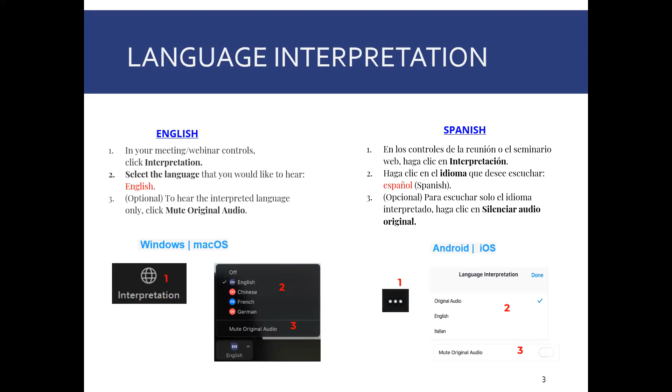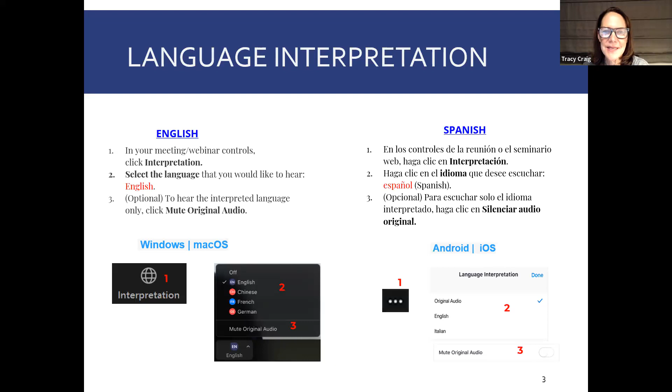This is Alameda County Department of Environmental Health's community meeting on the proposed plan to clean up contamination in soil and soil gas, which is the air spaces between grains of soil, at the 1232 High Street site in East Oakland. The purpose of the meeting tonight is to provide an overview of the proposed cleanup plan, answer any questions, and accept public comments from the public.

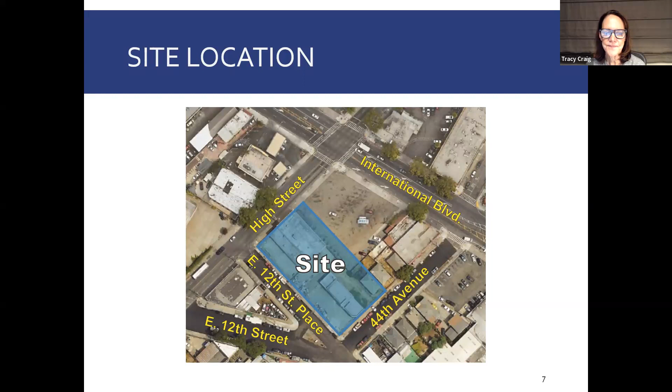Quick overview, the property owner is here listening today. The property owner plans to redevelop the site as a self-storage facility. Very important to note that the property owner did not contaminate this site, but is voluntarily cleaning it up to support redevelopment. There is lead found in shallow soils, and some benzene and chlorinated solvents found in soil gas, the air spaces between grains of soil.

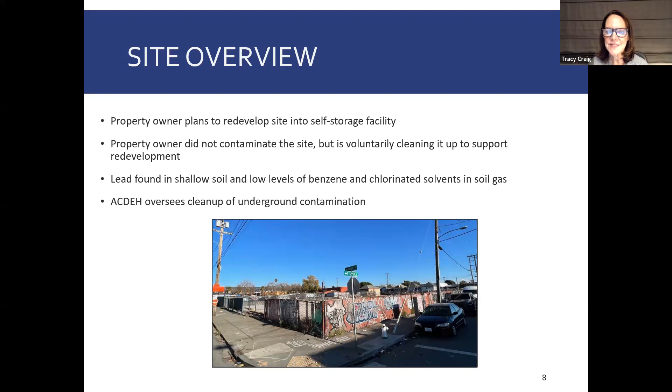The Alameda County Department of Environmental Health oversees cleanup of underground contamination. Purpose of this meeting tonight is solely to discuss the proposed cleanup. This is not about redevelopment of the property. And with that, I'd like to hand it over to Noel, who will go through site investigations, proposed cleanup plan, and community protection measures.

Good evening. There have been several site investigations conducted on this site, around half a dozen, starting in 2014 to the present, to evaluate the impacts to the subsurface from this historical land use. There were multiple historical land uses on the site, starting as an automobile service station, blacksmith shop, battery shop, paint store, and several other businesses including a mattress factory, that would have caused potential impacts to the subsurface from releases from these former site uses.

Those investigation findings have found lead in shallow soil up to approximately 3 feet below the ground surface at levels that would require cleanup, and low concentrations of benzene, tetrachloroethene, which is PERC or PCE, used as a cleaning agent, and its breakdown product vinyl chloride, in soil vapor at pretty low levels. Groundwater does not seem to have been impacted at this site from these constituents.

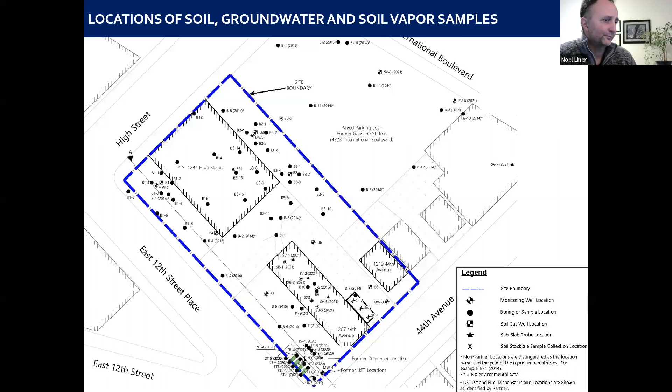So the corrective action plan is available on GeoTracker and is the subject of this discussion tonight. That plan is in draft format and it's available for public comment, to which we would respond if there are technical comments to the plan. That plan summarizes the investigation findings. It proposes the broad outlines of how the contamination of soil and soil vapor will be remediated.

That will include excavation of the lead contaminated soil. It will include installation of a vapor barrier and venting system to address the potential vapor intrusion issues related to the benzene, PCE, and vinyl chloride in soil vapor. That corrective action plan also includes community protection measures that will include air monitoring and dust monitoring during the soil excavation, as well as a truck traffic control plan. So those impacts will be mitigated to the local community.

And of course, we will address public comments before the corrective action plan receives final approval. That public comment period has extended through January 5th, so you have until that time to respond to the CAP, either by email or a phone call. You can contact Tracy Craig Communications and provide comments to the corrective action plan.

So the primary corrective action is proposed soil excavation. This is to remove lead impacted soil, which has been found to a depth of around 3.5 feet throughout probably about one third of the site footprint. That will be removed first. It will be loaded into trucks and taken to a disposal facility that is permitted to receive lead contaminated soil.

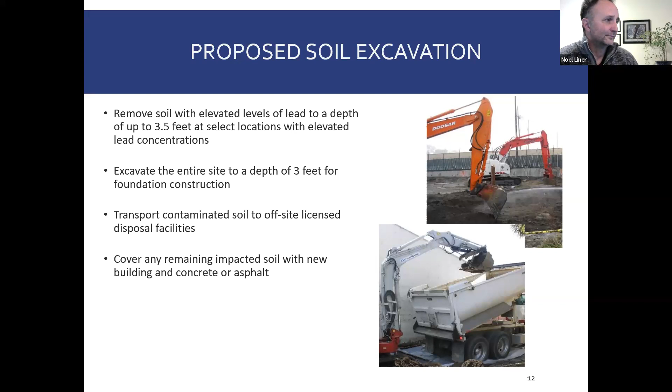Following the removal of the lead contaminated soil, those excavations will be backfilled. And prior to the construction of the building, crushed rock will be placed below the slab foundation. Within that crushed rock, there will be several vent pipes such that any vapors that emanate from the ground surface will become trapped underneath the building and then vented through the pipes up to the roof line, so they will not go into the building.

During the remediation, there will be community air monitoring conducted. This air monitoring will be conducted by the environmental consultant, P&D Environmental, Paul King, who is on this call. There will be real-time air monitoring during the removal of the lead impacted soil to verify that there are no impacts to the community.

This monitoring will be in accordance with the Bay Area Air Quality Management District requirements, and those action levels are for protection of the surrounding community members. There are also actions to stop dust from leaving the construction site, which will include watering and temporarily stopping work as needed. Those actions will be implemented in the event any visible dust is seen leaving the site where there are sustained winds beyond 20 miles an hour.

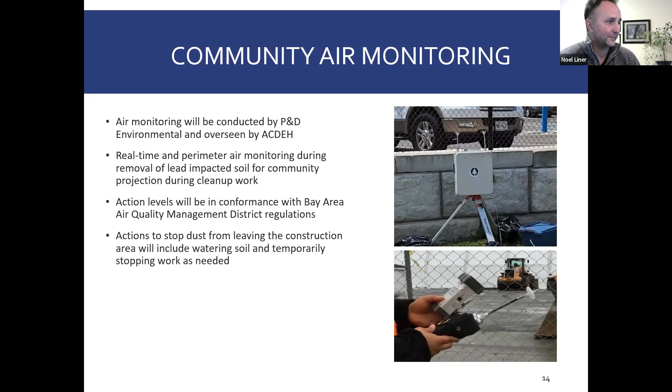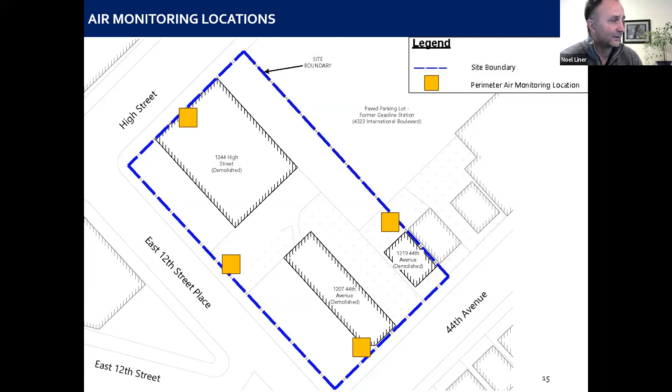We do not expect that there will be groundwater management at this site. Groundwater is significantly deeper here than what the excavation will be advanced to, because that excavation will only be a few feet deep.

It should be noted that these trucks will be staged in the parking area that is covered in asphalt. And as such, that will also help to keep dust to a minimum from having the truck tires covered with dirt. Any track out onto the surrounding city streets, if there is any, would be cleaned with a wet sweeper.

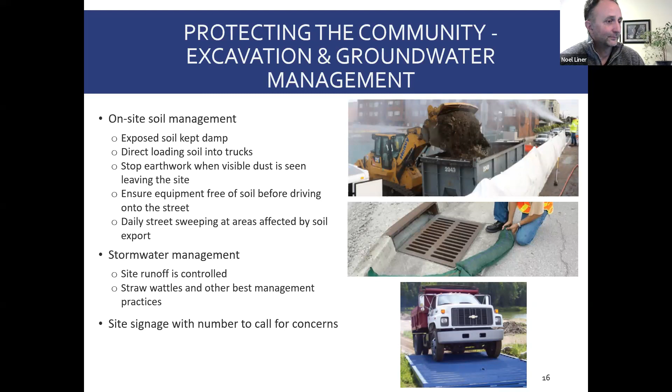Because this site has a large parking area, there will not need to be parking on adjacent residential streets.

Consistent with the Bay Area Air Quality Management District requirements, trucks will not idle for longer than 5 minutes at a time.

All trucks will be covered upon leaving the site, so dust does not emanate from the back of the truck. There is a tire washing station on the site to prevent track out. And of course, the trucks will be regularly inspected to assure that they are in good condition.

There is a city-approved truck route that will minimize travel through residential streets. So it will be the most direct route from the site to the nearest adjacent freeway.

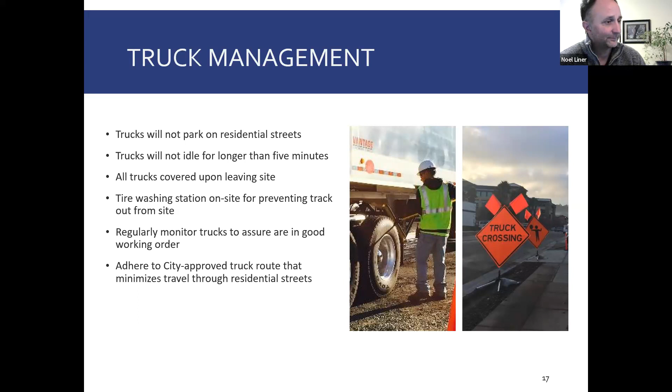Great, thank you, Noel. It's important to Alameda County that the community knows what's going on. So as Noel said, we will have site signage with numbers that you can call. On that will be my phone number, my cell number. You can call me immediately if there's an issue. Also, the Bay Area Air District will be on there as well as Alameda County.

We'll also be distributing a work notice to our neighbors around the site one week prior to the work starting, so that you'll know to expect it. And finally, all of our environmental reports, including the corrective action plan that you can comment on this evening, and the air monitoring results that will be done during the work, will be uploaded to the Water Board's website, which is GeoTracker, and we have a link to that in the upcoming slide.

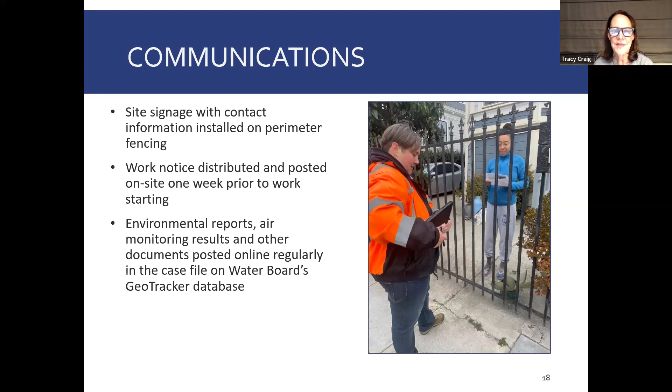Okay, so our schedule, again, we're in the middle of the public comment period, which ends on January 5th. Alameda County will review all of the comments received and then make a decision on the document. We will issue a formal response to comments. To anybody that comments, we'll send you a formal response on how your comment was considered in Alameda County's decision making.

Again, we'll distribute the work notice one week before work starts. We believe the environmental cleanup will start in mid-February and will last one to two weeks. Work hours are sanctioned by the City of Oakland, and those are 7 a.m. to 7 p.m., with work expecting also to occur on Saturdays from 8 to 4.